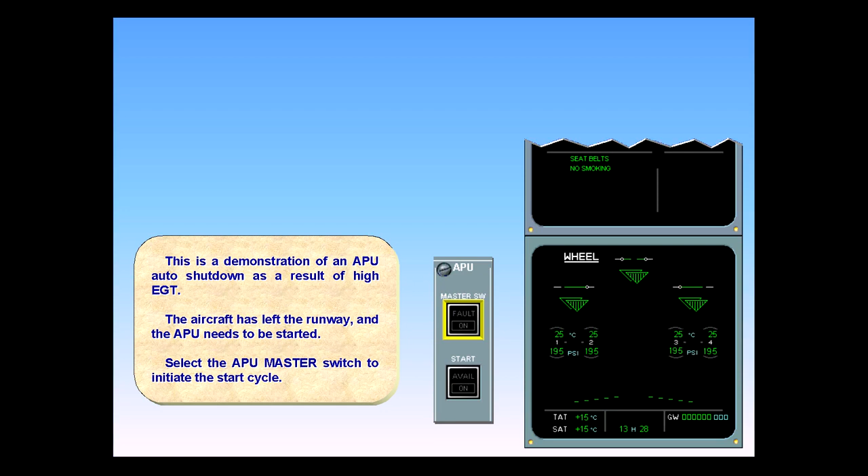The aircraft has left the runway and the APU needs to be started. Select the APU master switch to initiate the start cycle. Now select the APU start switch.

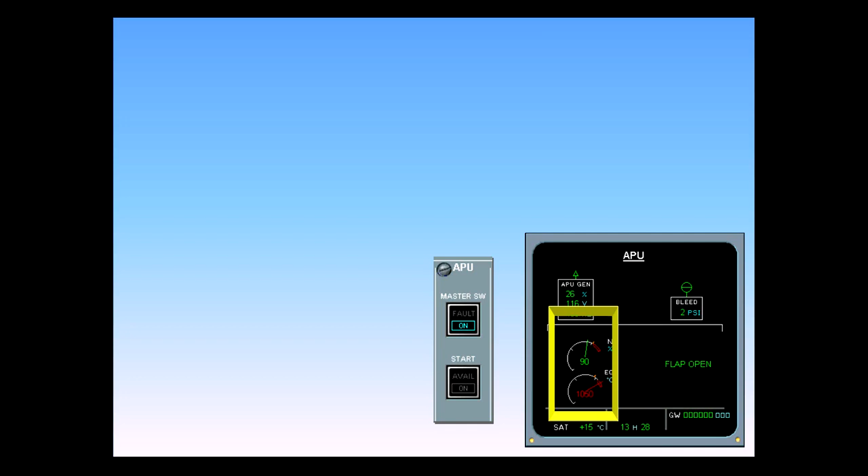You hear the chime and see the master caution. Extinguish the master caution. On the engine warning display, read the title of the failure.

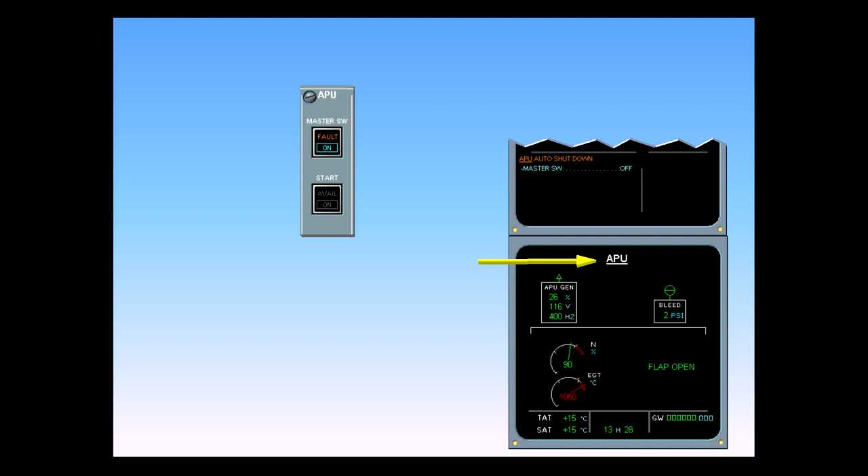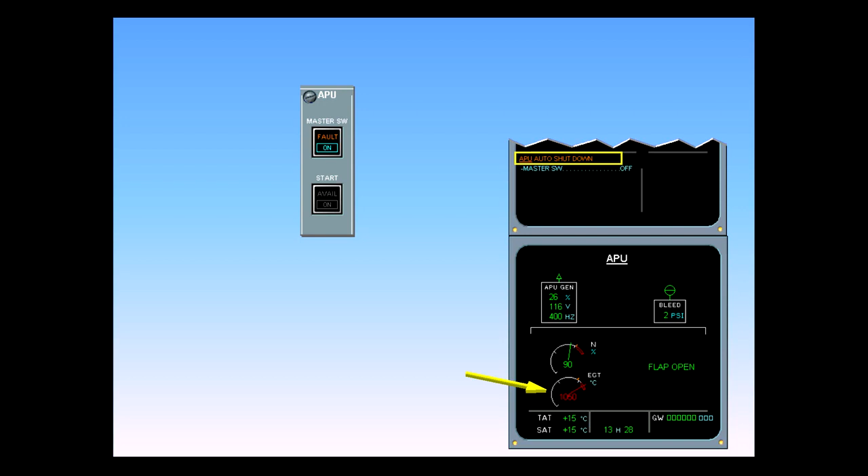The ECAM APU page is automatically displayed. The ECAM Caution APU Auto Shutdown appears amber to indicate that the APU has initiated an automatic shutdown. In this example, the EGT has exceeded the maximum limit. Notice the red EGT indication on the ECAM APU page.

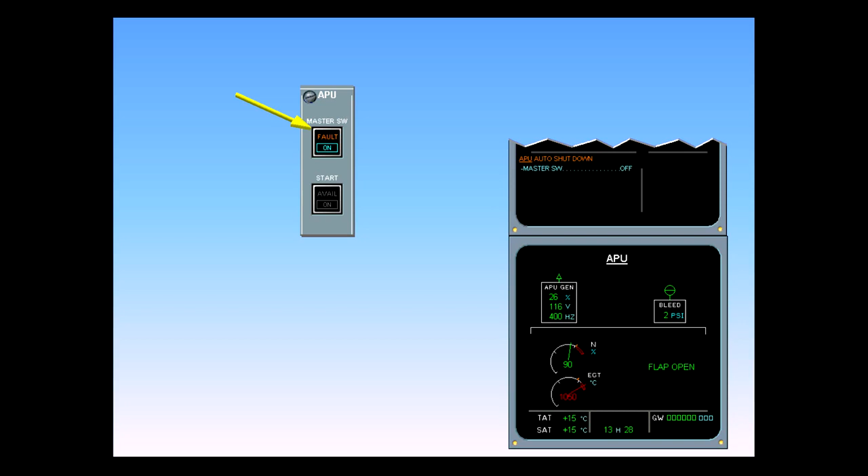On the APU control panel, the fault light is illuminated on the master switch. This provides a cross-check of the ECAM and locates the push button to be activated in the procedure.

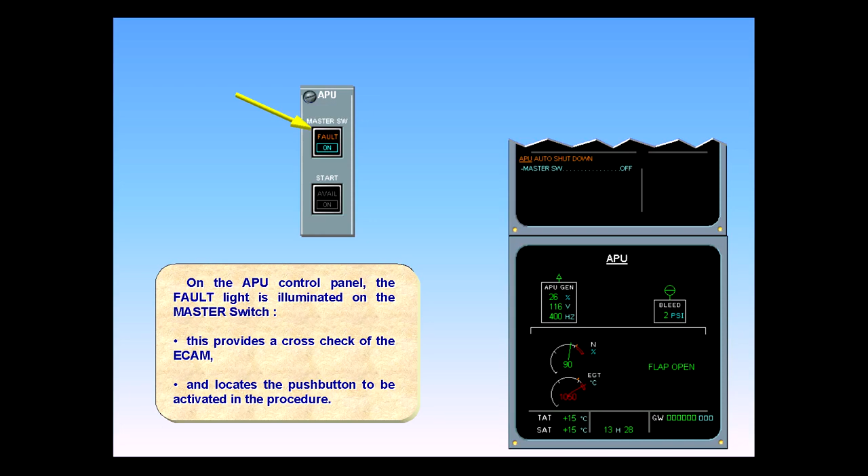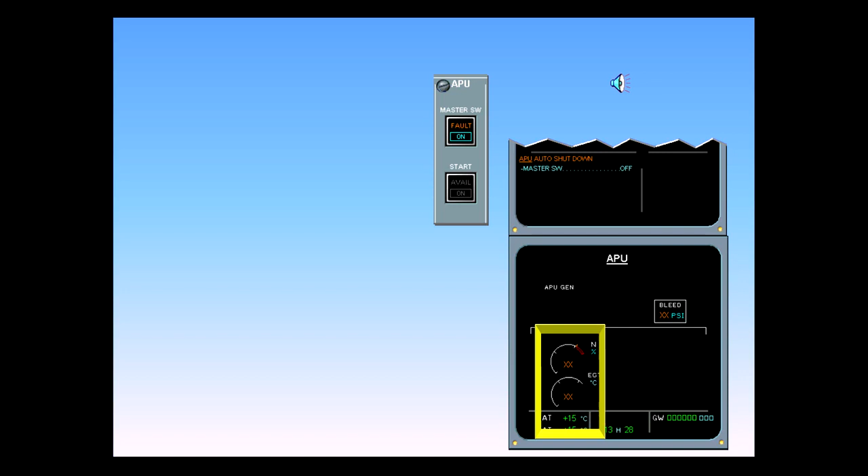The APU has completed its automatic shutdown. An automatic shutdown can also occur for other reasons, for example, overspeed, slow start, low oil pressure, etc. Now perform ECAM action. Turn off the APU master switch.

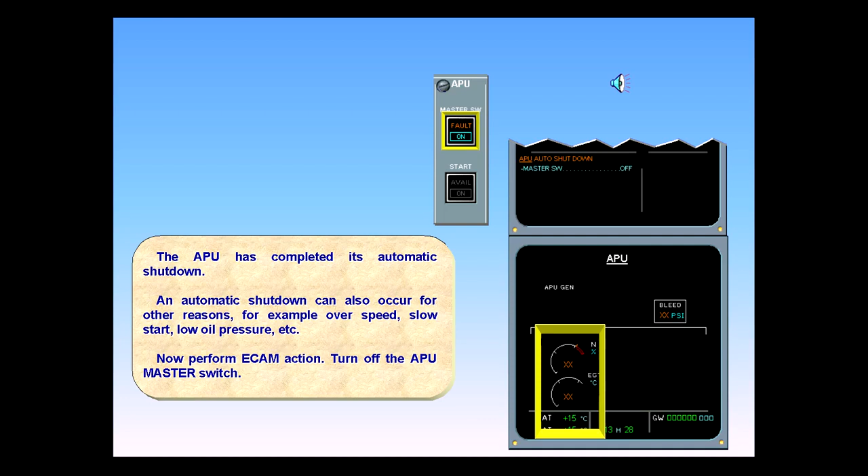Note that the blue on light in the master switch and the flap open indication on the ECAM have disappeared, indicating that the APU is fully shut down. The abnormal procedure is complete.

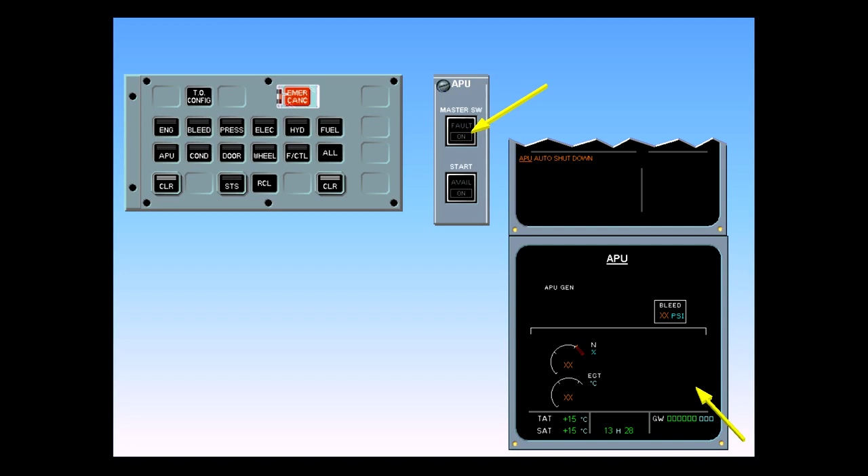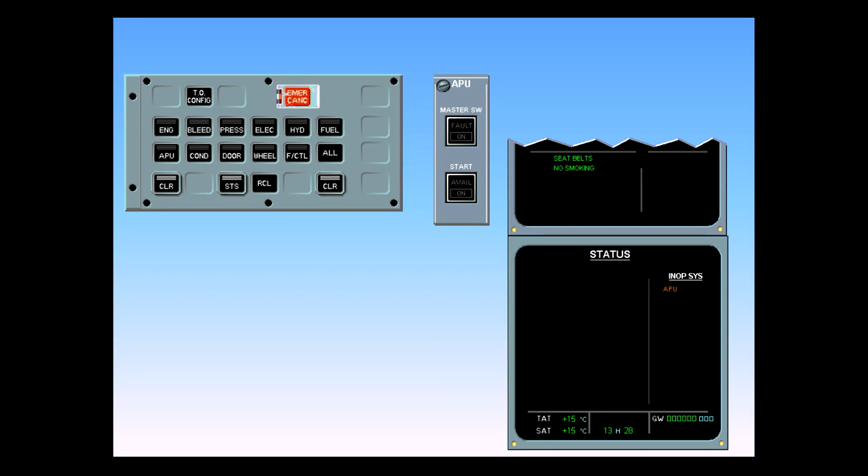After review and confirmation, clear APU. The status page is displayed. The inoperative system is the APU. After review and confirmation, clear status.

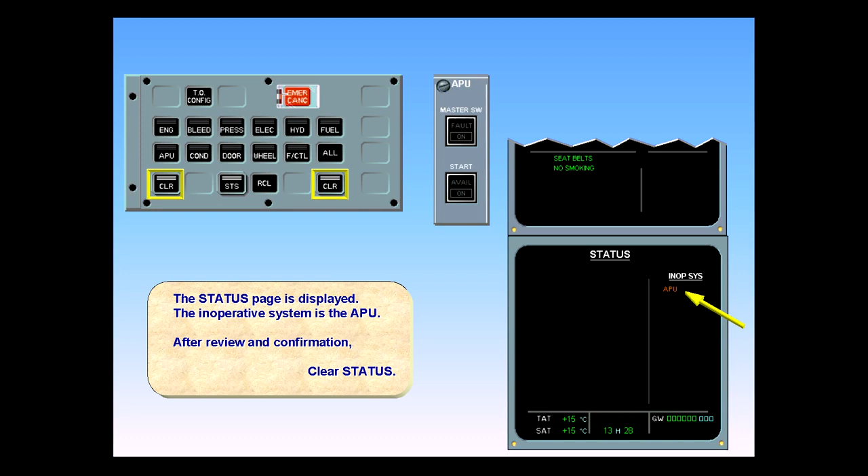ECAM complete screens normal. The status reminder is displayed on the engine warning display. Note, automatic shutdown protection is available throughout the flight.

Let's now look at a situation which is similar to an APU auto shutdown, but more critical, the APU emergency shutdown.

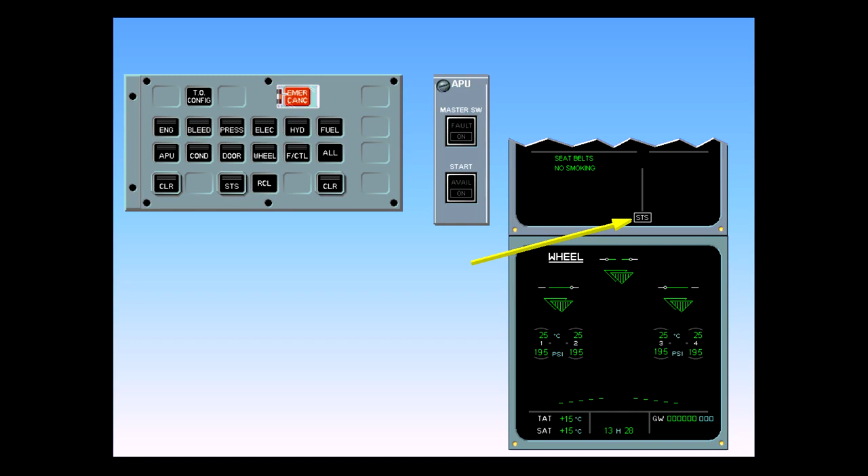If an APU fire is detected on the ground, an APU emergency shutdown occurs, and the APU fire extinguisher bottle is automatically discharged. There is no crew action to be taken. This will not happen in flight. The crew must shut down the APU and fight an airborne APU fire.

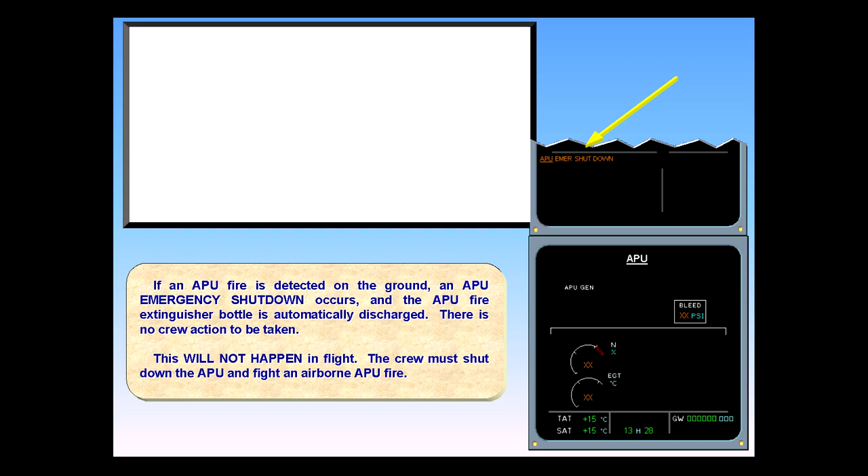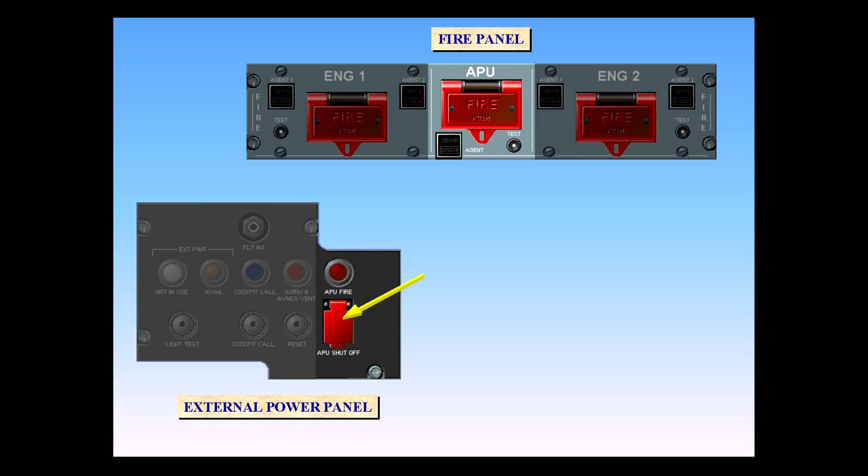An APU emergency shutdown also occurs when the APU shutoff push button on the external power panel is pressed, or when the APU fire push button on the fire panel is pressed. However, in neither case is the fire bottle automatically discharged.

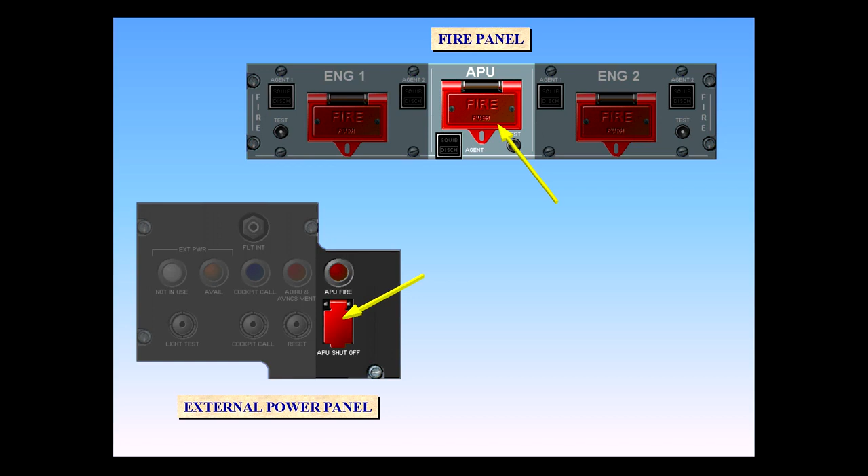On the ground, an auto shutdown occurs when APU parameters are exceeded. An emergency shutdown with automatic extinguishing occurs if an APU fire is detected. In flight, an auto shutdown will occur for the same reasons as on the ground.

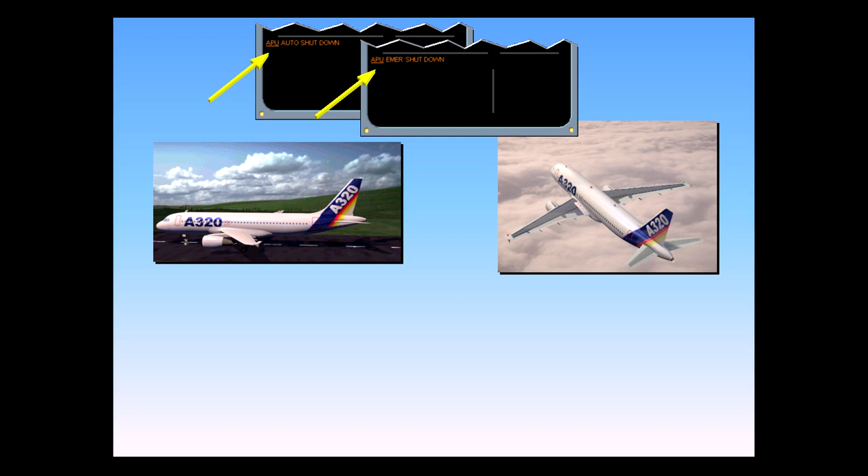If an APU fire occurs, the crew must take action. There is no automatic shutdown or extinguishing. The APU emergency shutdown procedure is displayed at the end of the APU fire procedure.

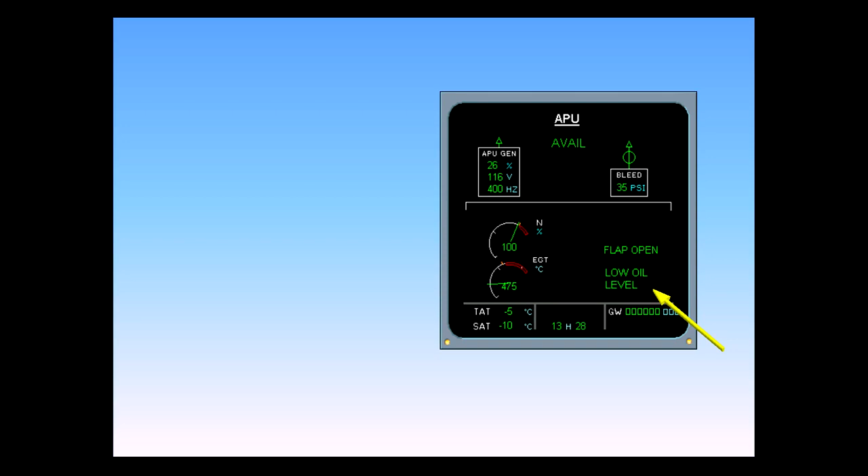There are several other indications that could appear on the APU ECAM page. The low oil level advisory pulses in green if the APU oil quantity approaches its minimum value. Note, minimum quantity allows normal APU operation for an additional 60 hours.

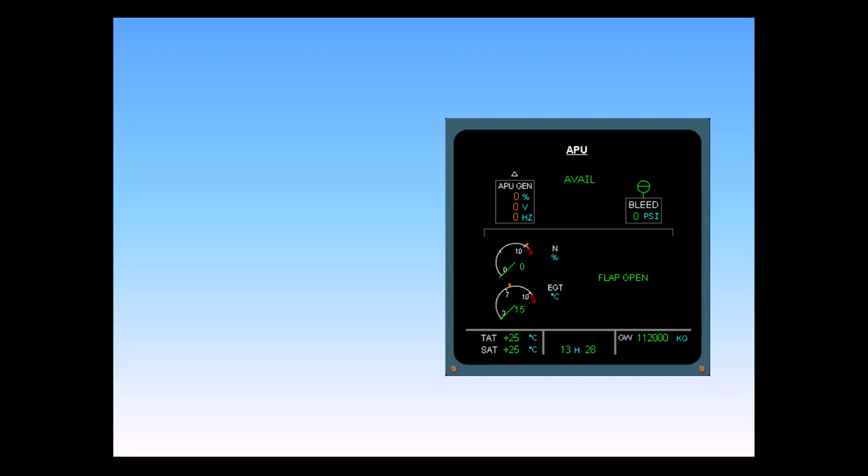When starting the APU, the fuel low pressure indication appears in amber when an APU fuel low pressure is detected. Note, even though this message is in amber, it is an advisory.